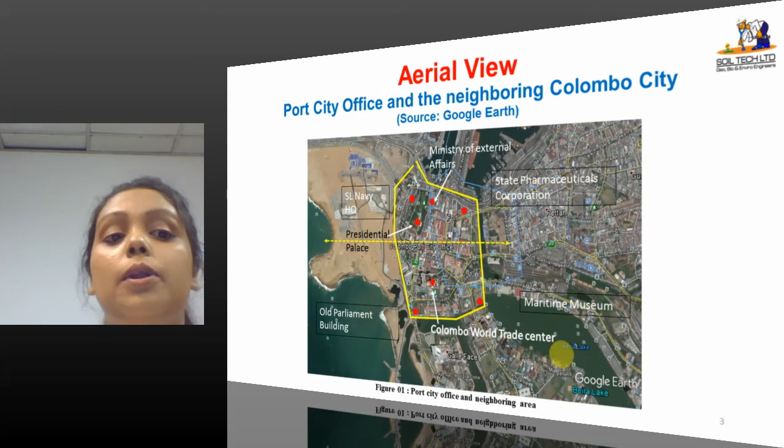This is the site plan of the Port City area, and this is the aerial view. Here you can see many major buildings like the Sri Lanka Navy headquarters, Old Parliament building, Ministry of External Affairs, Colombo World Trade Center, and many more, as well as smaller buildings. We say they can be affected due to this Port City project. So how is it going to affect them?

The total land area of the Port City is about 269 hectares, and about 56% has already been reclaimed. For this we are going for a geological analysis, and with that we are going to present our assumptions and the possibilities of what can happen.

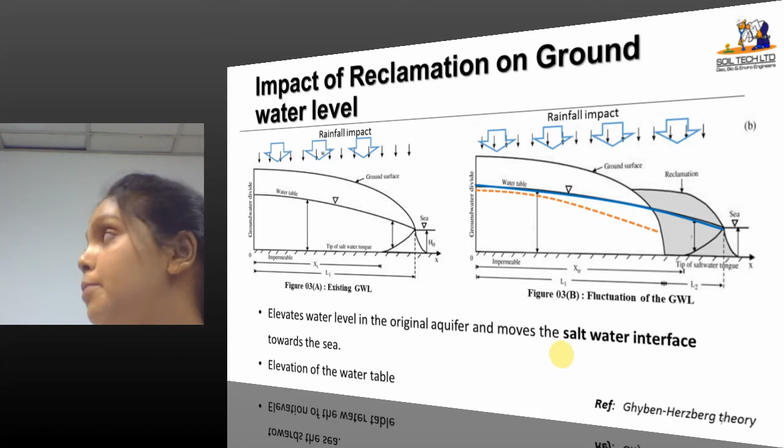So due to this land reclamation, basically the Port City land reclamation, the groundwater level can rise up to some meters, and with that some impacts can happen. Our assumptions are all based on the groundwater level data we have collected and the subsoil data.

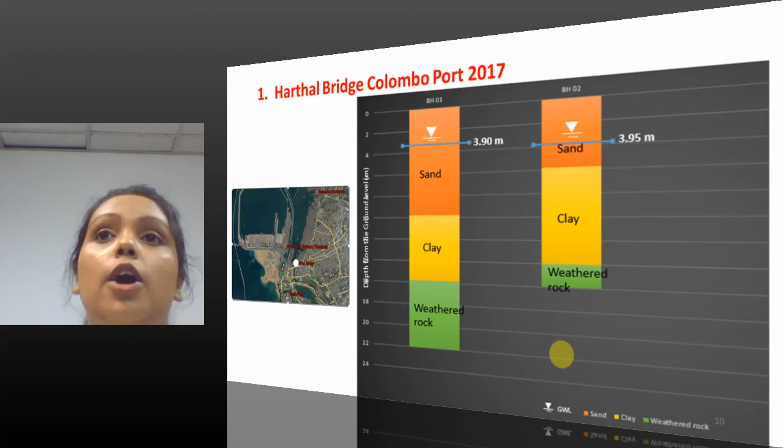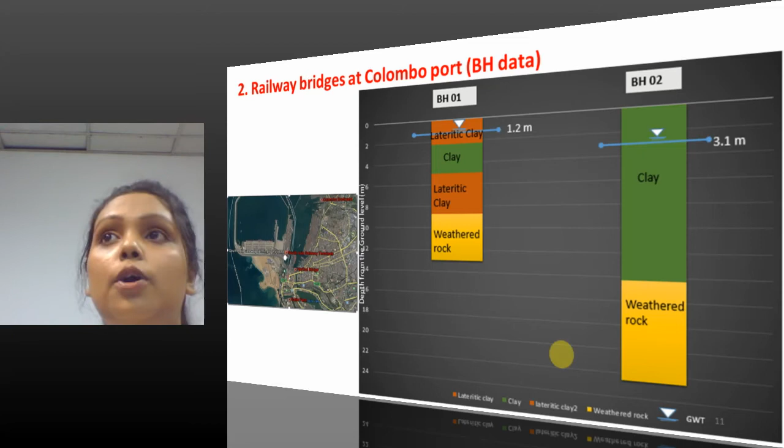Considering the Harthal Bridge at Colombo Port, we did some boreholes there in 2017, the most recent one, and found the groundwater level at 3.9 meters below ground level. The second is the railway bridges at Colombo Port, where we found groundwater at about 1.2 meters below ground level, and in some places 3 meters. Another borehole in SAGT Colombo Port showed groundwater at about 2.7 meters below ground level.

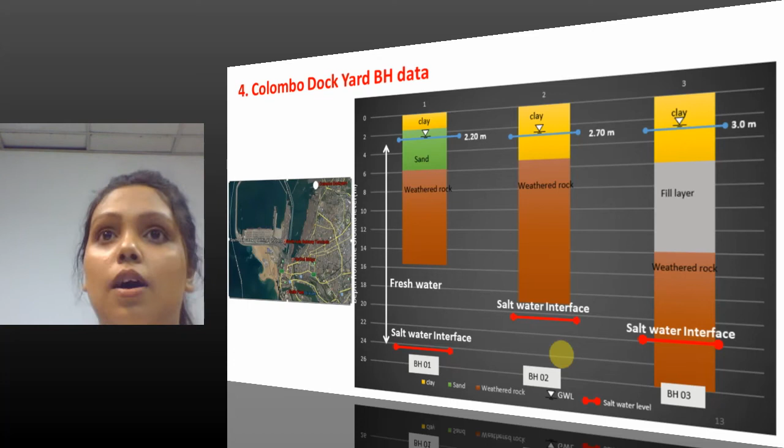At Colombo dockyard we did some boreholes as well as tube wells. In the borehole we found the groundwater level at about 2.2 meters below ground level. The most interesting thing is we found the salt water interface at about 24.3 meters below ground level, and here 21 meters. Up to that extent, in our tube wells, we were able to find fresh water. These are the tube well data we collected from Colombo dockyard.

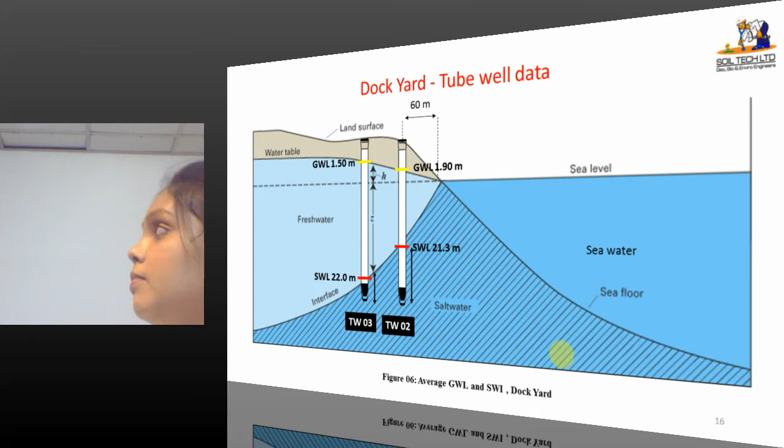This is what we have shown with the graphs. Here are the groundwater levels, and here the salt water interface. You can find some mixed water, but up to some extent you find fresh water even close to the coastline. The distance is about 60 meters from the coastline, but you find fresh water. That means there is considerable groundwater in the port area.

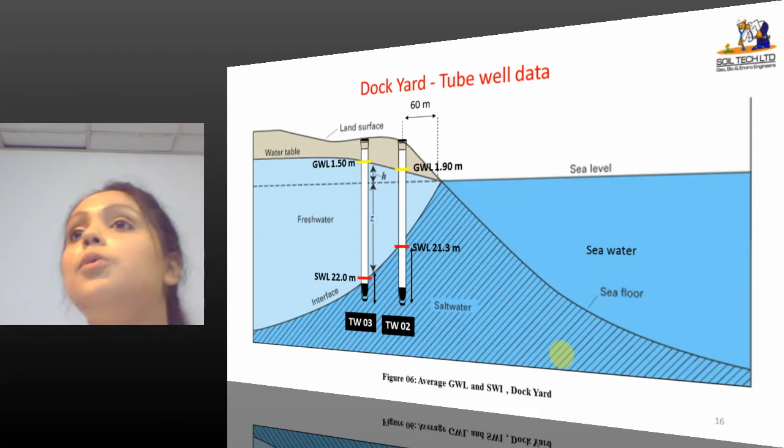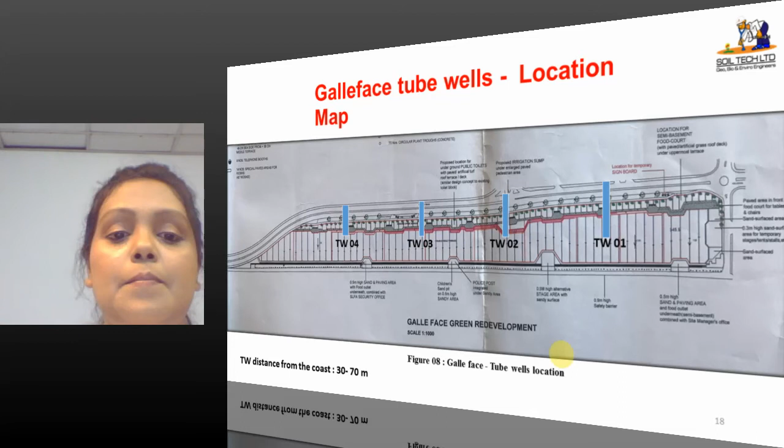These are the tube well data, and with the chemical analysis, basically the electrical conductivity of water, we found they are good fresh water which is more consumable, and the seawater level we found at about 16 meters below ground level. This is the graphical illustration of the water levels of the Galle Face area. Up to this extent, you find fresh groundwater.

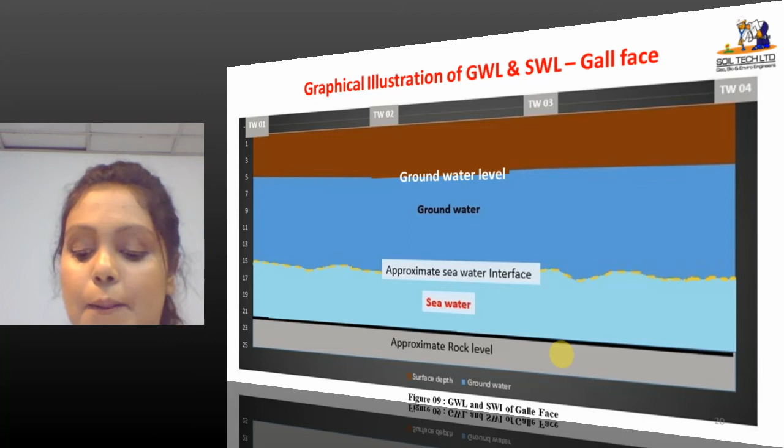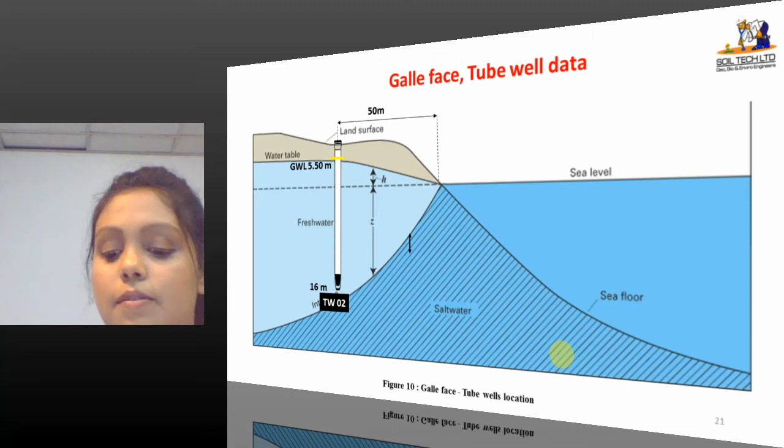The second part we did was subsoil data analysis. By using the boreholes we did again in Harthal Bridge, using the SPT values, we calculated the bearing capacity using Terzaghi. So in this graph, the red line shows the bearing capacity when the groundwater level is 3.9 meters below the ground level. That is the existing ground level.

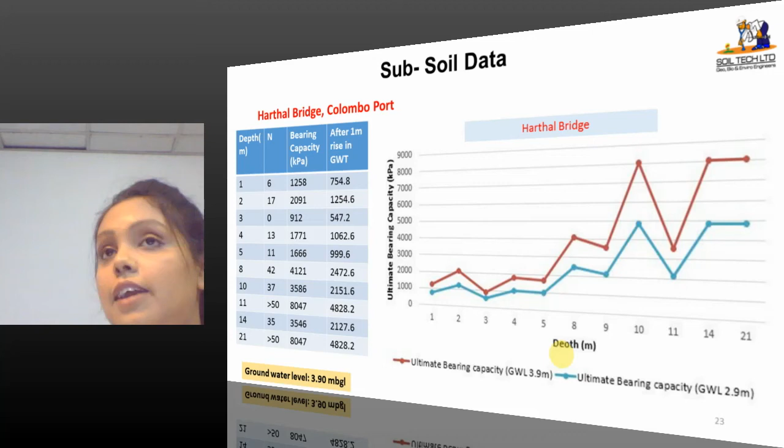And the blue line shows what happens when the groundwater level rises about 1 meter. The bearing capacity reduces by a considerable amount. Here you can see the bearing capacity is 8047, but when the groundwater rises by 1 meter, it reduces to 4828, a considerable reduction.

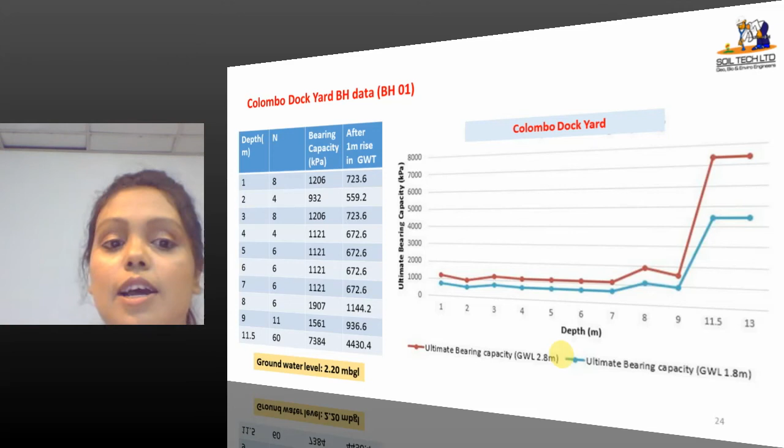Here we again calculated the bearing capacity using the SPT values with the boreholes we did in Colombo dockyard, and it is shown in this graph. See how much the bearing capacity reduces just after a 1 meter rise of groundwater level. And here, SAGT, South Asian Gateway Terminal, Colombo Port.

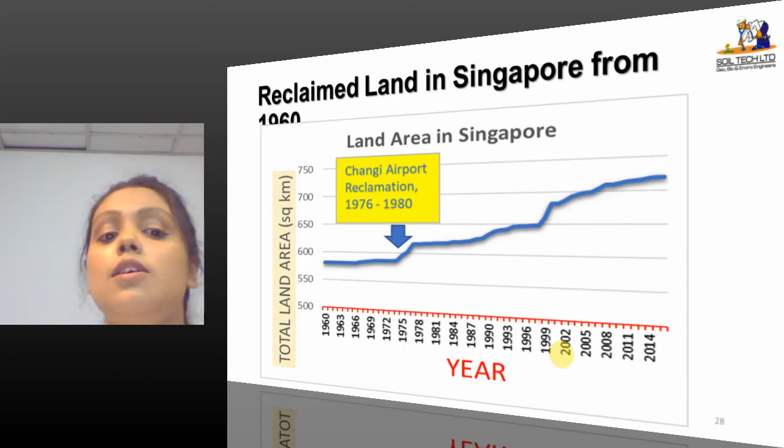Here again we calculated the bearing capacity, and with all these data we can see that with the increment of the groundwater level, the bearing capacity definitely reduces. And we have more examples around the world. Not only Sri Lanka does this kind of land reclamation, but Hong Kong, Japan, the Netherlands and Singapore have done this kind of reclamation. The Changi Airport is a very good example from our Dr. Karunaratne, since it is his experience. So this is all based on coastal reclamations.

Now we are going to mainly focus on the impacts, what can happen when the groundwater level rises. It can affect structures and buildings we mentioned in the previous slides, like the BOC headquarters, Sri Lanka Navy headquarters, and the Parliament building. Structures on simple footings can be affected, and buildings on piles can also be affected, but they are much safer than buildings on simple footings.

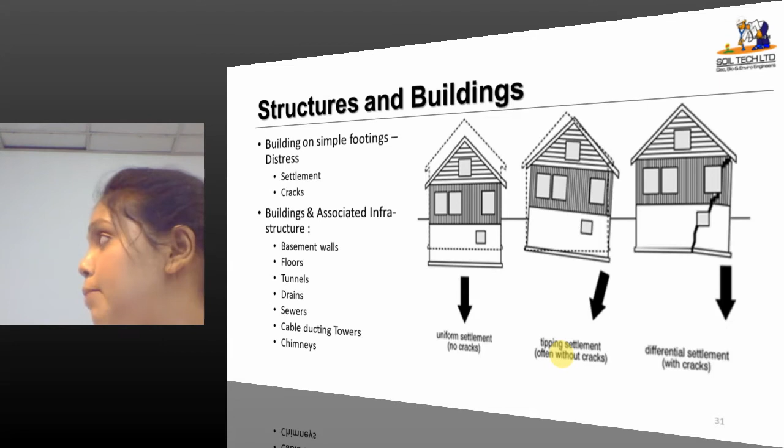So what happens here? The basic thing that can happen is settlement, and due to settlement, cracks can occur. If the walls or floor of a building get cracks, you can simply assume that is due to settlement. If it is a uniform settlement, sometimes you will not feel it for some years. But if it is a differential settlement, you will definitely get cracks in the floors and walls. And not only buildings, but tunnels, chimneys and towers can all be affected.

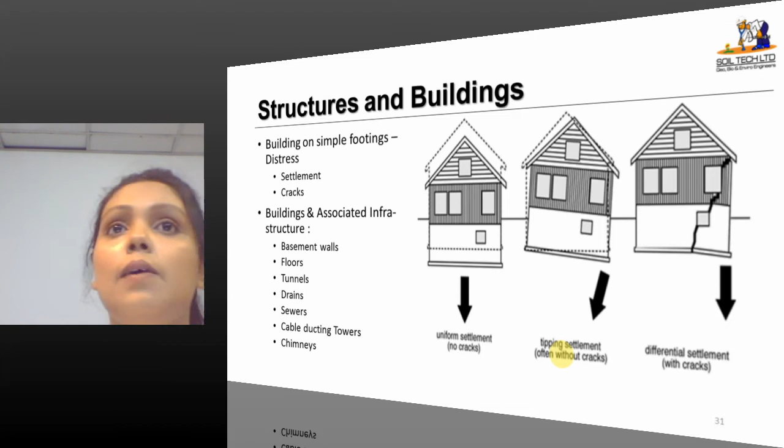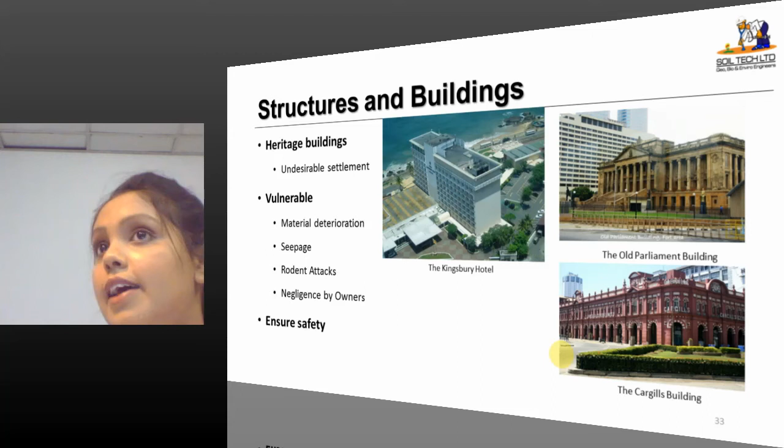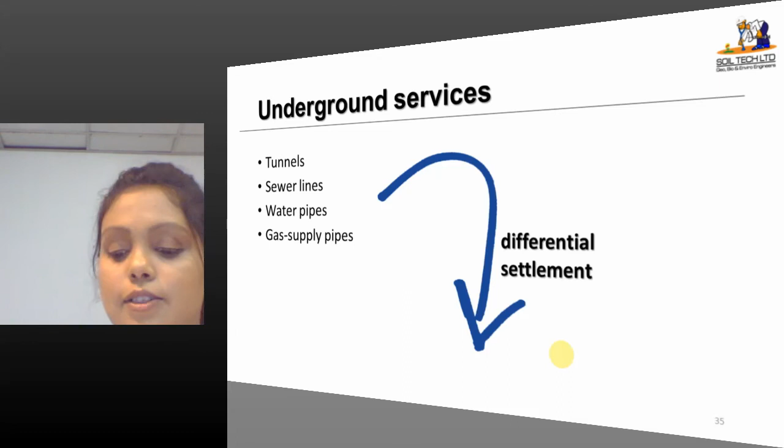The other one is underground services, like sewer lines, water pipelines and gas pipelines. These can also be affected by differential settlement: joint dislocations, leakages and cracks can happen. There are many examples. As an example, I took these from news articles about what happened in Tamil Nadu due to leakage of underground gas pipelines. These kinds of disasters can happen due to such a simple thing.

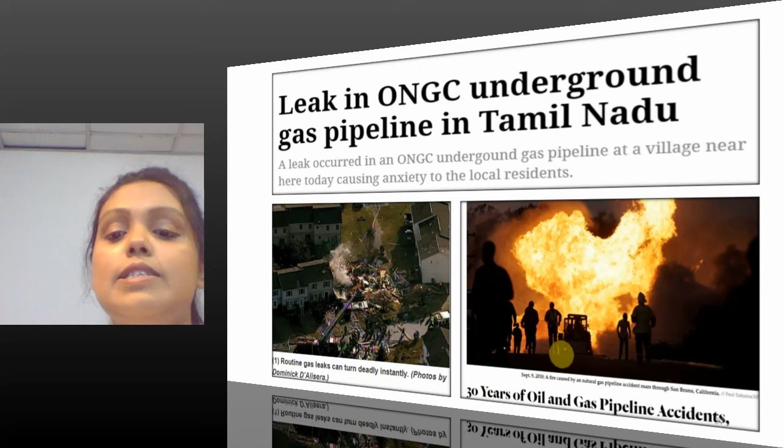The other thing is environmental issues. The water quality in wells definitely changes, so we can say something is happening with the underground water level.

So I invite Dr. Karunaratne to go into more detail about this research, and thank you.

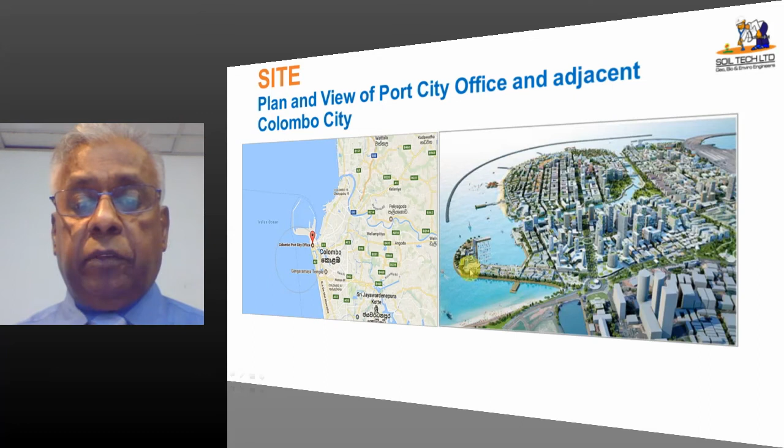So we are trying to find out the influence of this reclamation on the groundwater in the adjacent area. I thought the nearest area is Fort, so let me go on to the subject. This was shown earlier, the plan view of the Port City office, and then you see the breakwater going over there, and the part we are worried about in plan is the reclamation over there.

So if I go to the large scale map, here is the Colombo Port City office, and this is the Chaitya road, and this is the water body coming from the port area towards this. Some of you may know there is a gated connection here, so the water from here to there can be sometimes different. And then from the Beira Lake, it comes over here.

Now our study here is, when you do this reclamation adjacent to the Chaitya road area, what will happen to the water table, because some of the work done by Soil Tech, as shown by my previous speaker, had found that some of these boreholes and tube wells have a very remarkable way of varying its properties, especially the freshwater part and then the saltwater part.

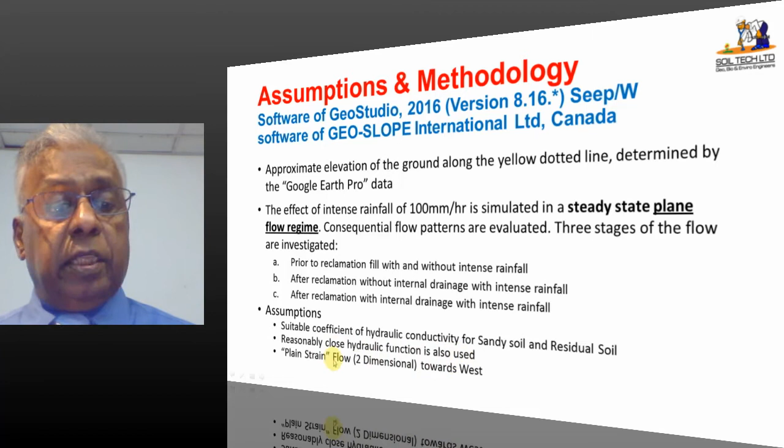Then we have a reasonably close hydraulic function also assumed, which is the hydraulic conductivity of the sand. And then, as I mentioned earlier, plane strain flow is taken into account. Now, there are a few cases we have studied.

The first case is no reclamation, no rainfall, there is drainage at Chaitya Road, and what will happen to the groundwater table. This is the base analysis. And we have got a value of 1.17. I'll show you the results.

We assume the permeability of the sandy soil to be about 0.005 meter per second at 10 kilopascal, decreasing to 1/5 of that at 100 kilopascal. Subsequently, I changed this number to 0.5, meaning let's assume the sandy soil is a bit more pervious at 10 kPa, and these results I am going to show you.

And then we put the reclamation, rainfall, no drainage, then the reclamation, rain and drainage. And I am also going to show you slightly more efficient drainage at the same location.

Now here is a base diagram for this. As you see here, the sea is on the left hand side in this diagram, and this is the fort area along that yellow cross section I did.

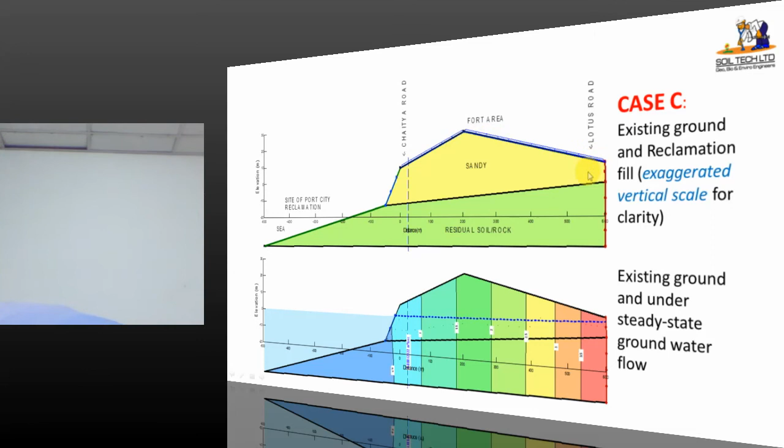Now I wonder whether you can see that arrow. Can you see that arrow, those at the back, or should I use the red light? Red light is better? Okay. There are some of you who are as bad as me with respect to eyesight, so I appreciate that point. Now this is, the only problem is I have to change my head that way to see that, so you may lose the voice there.

So be reasonable with me. Now this has got a horizontal scale which is different from the vertical scale. As you know, the fort area is not that hilly as shown here, so I have exaggerated the vertical scale, and the horizontal scale, as you see from here to here, is about 100 meters, whereas some of that is only 10 meters.

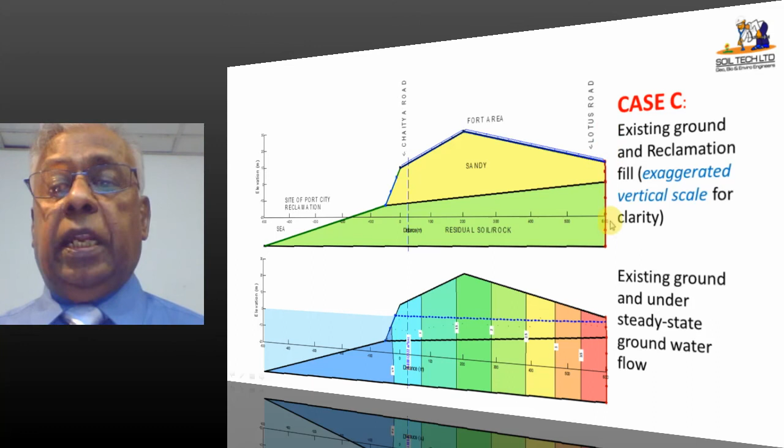So once that has been done, what is done here is, in the second diagram, simulate the sea level on the left hand side, and then use the existing groundwater table. What are the boundary conditions? On this side, this is that canal coming from the port area toward the Beira Lake. So we have a boundary condition which is about 4 meters high, and on this side it is the sea level.

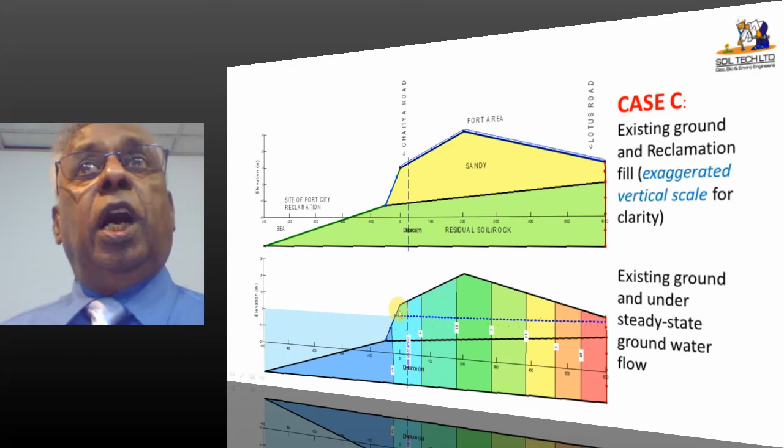So that side is the sea level, and therefore you can see that the water table is going to go down. That is a reasonable assumption that anybody would say, and that is how it looks like. So I thought the software seems to be working if that's the case.

So if you go to the next one, what we have done now is on the left hand side, the reclamation is now fully operational, but there is supposed to be a drainage system there according to the project report. But imagine that the drainage is closed or blocked. Then what happens when you get rainfall of 100 millimeter an hour? This is what happens. It goes up and comes down.

Now the only question is, are you sure that it will rise so much? You will be surprised that the values I am going to show you are beyond imagination. But don't worry about the numbers. Numbers are not that important. Get the trend. That is what is important right now.

Okay, let's go to the next one. I am going to give you some results. This is the first one I got, 1.17, no reclamation, no rainfall, drainage at this, the groundwater table at 200 meter from the edge of the Chaitya road.

So if I go back, 200 meter at the edge of the Chaitya road is shown here. Chaitya road is somewhere here, 200 meter comes around here. So it is quite close to this peak there. So I always get that point for comparison. You can take any other point as well, but that is good enough, I think, for our analysis. So if you get that, you can see in the second one, if there is rainfall, no reclamation, it can rise to 13.18.

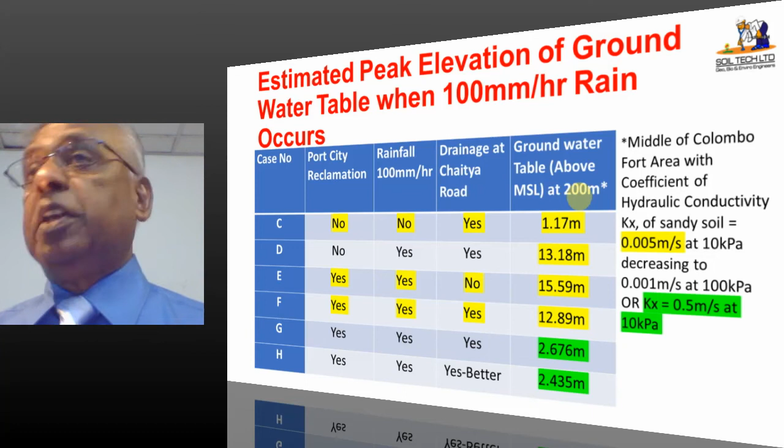The next one says there is reclamation and there is rainfall, no drainage at the Chaitya road. It can rise further. And the next one is, if you allow the drainage to take place, it drops a little bit. Now I change the permeability from 0.005 to 0.5, it drops. That looks reasonable. So somebody might say, why don't you use reasonable numbers? So you have to try and see. That's what the engineers do. Try various possibilities and get some idea.

So now we see a very important thing. If there is a reclamation, if there is rainfall, if there is drainage, still the water table can rise. The water table will not stay at the same level as before the reclamation. Therefore, we have a problem. Will the water table rise? That will affect the buildings and other infrastructure within the fort area. That's what my previous speaker pointed out. So let's go to the next one.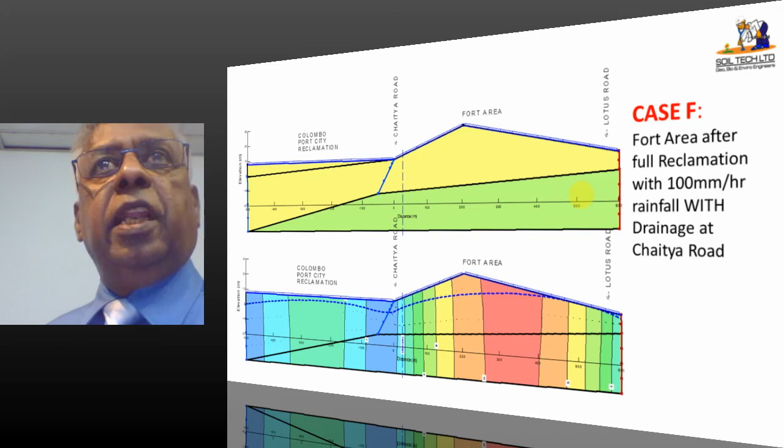Now, this case is slightly different. I am adding the drainage there. As you see here, the trend is correct. It drops here, then it goes there. So within the reclamation, the water table rises here. And this is like Jaffna Peninsula. If you have a well here, you can take fresh water from there. But slowly it will go down, and sometimes it might become level with the sea level, and you might absorb seawater as in Jaffna Peninsula. So you have to be careful. But anyway, as you see here, if you have a drainage system, this can be controlled.

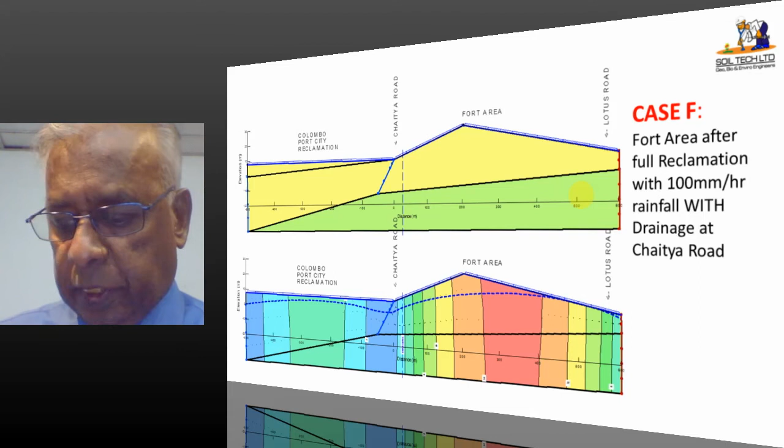Now the observations are very simple. All reclamation changes groundwater conditions in the adjacent environment, unless you are reclaiming and forming an island far away. With the progress of the reclamation, changing rainfall intensity, drainage provision and the sea level, the groundwater level will respond correspondingly. Unfortunately, the groundwater level will not go down, but it will go up because you are blocking the normal path of the water.

Then the second is that the port city reclamation is lying to the west of the fort area geographically. The groundwater table of the Colombo fort area appears to be influenced by the proposed port city reclamation. We are not saying something is wrong with the port city. We are only saying that if there is a reclamation nearby, then the adjacent ground in the mainland may have a changing water table. If the water table changes, what would be the impact on the rest of the infrastructure, etc.

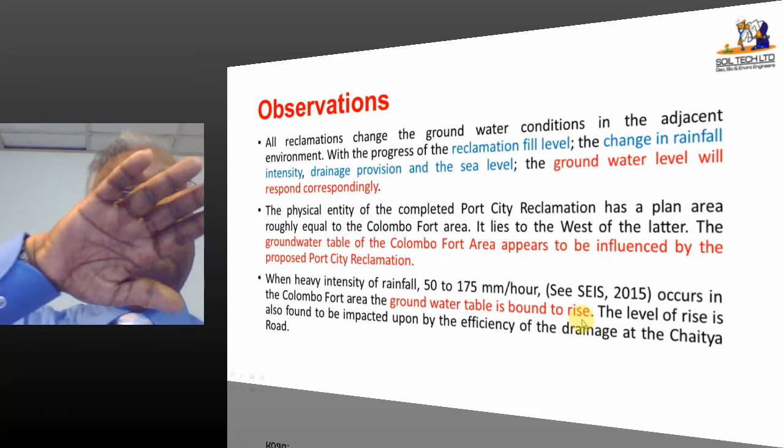Now, with heavy intensity of rainfall between 50 to 175 millimeters per hour, as I said, see the SEIS 2015 report, if that occurs in the Colombo fort area, the groundwater table is bound to rise. And my previous speaker showed you water table variation within the ground when there is a reclamation; it is found in your flyer on page 2, with the same figure, and you can see the reclamation will cause the groundwater table in the mainland area, the fort area, to change, generally to go up.

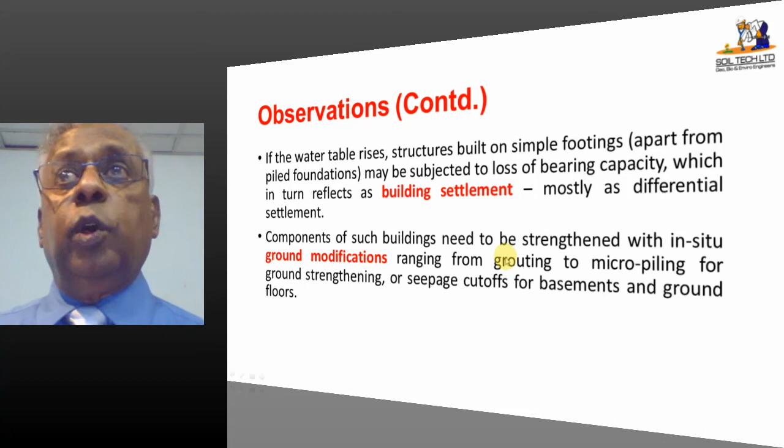And the observations continue. Now what happens if the water table rises? Building settlement is a problem. If buildings are founded on simple footings, you know that the bearing capacity will be affected. And the only way to handle this situation as engineers is to imagine that some buildings have simple footings and will be subjected to water table rise, and therefore we have to take appropriate preventive action. How do you take preventive action? You must know which ones have simple footings, not piles. So we have to have a feedback system or get the information.

Data must be obtained. So I'm going to look at those things here after this. Now, in order to support our idea, this author J.J. Jiao submitted this paper in Groundwater in 2001. He mentioned that a significant increase in groundwater table can happen if the scale of the reclamation is great and the hydraulic conductivity of the reclamation material is low, which means that if the reclamation of the port city is a tiny one compared with the fort area, you may not get that much of an influence.

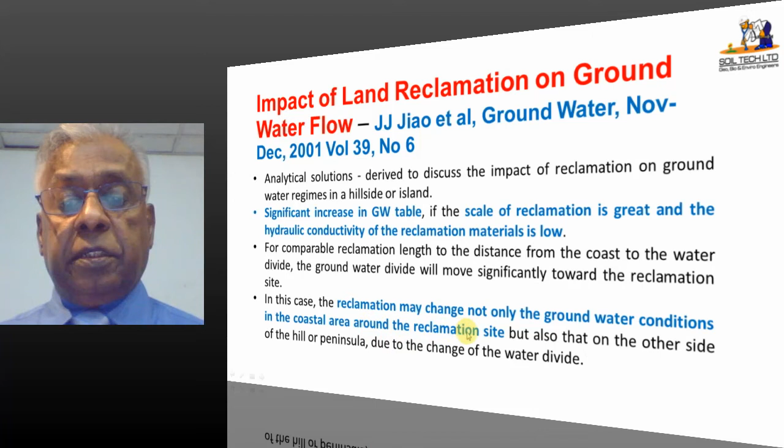So if they are about the same size, naturally one may influence the conditions of the other one. And then the last one shown here is the reclamation may change not only the groundwater conditions in the coastal area and around the reclamation site, but it can also change other things within the main area. And lastly, he also mentioned that the groundwater regime due to a large scale reclamation should be studied. Why? Change the coastal environment.

There are other things. I think a hydrologist may come and say, because of this reclamation, our littoral drift has got changed, or the Kelani River mouth has got choked. I don't know. This may come up later. I'm not speculating at the moment, but it can happen. And then some of you may later find that somewhere down Hikkaduwa or even Galle Harbour or some other place, there are some chain reactions. They come with time. So each of these must therefore be kept in mind. If something is changing, keep in mind something is changing, and therefore see whether there is an influence from some of these things that are coming in.

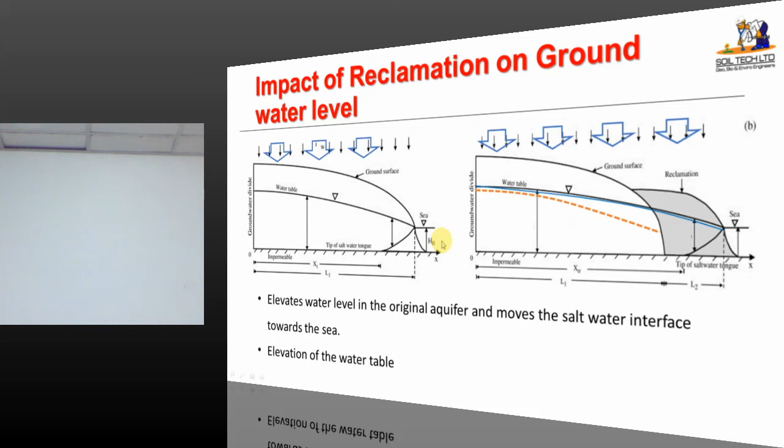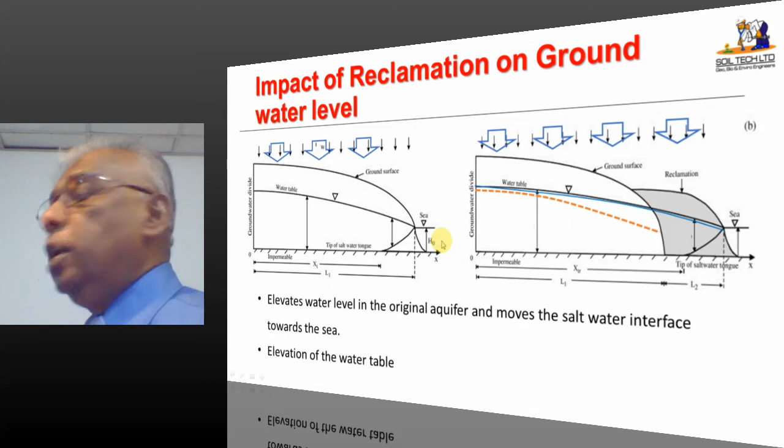Now what is interesting here is again that when you do the reclamation adjacent to this with no drainage, the original water table shown in red color changes to that one. So you can see it automatically goes up. Most of the thing is taking place here, but if you have a drainage here, you can actually control this new water table to a lower value. So there are various ways of helping this problem if it occurs.

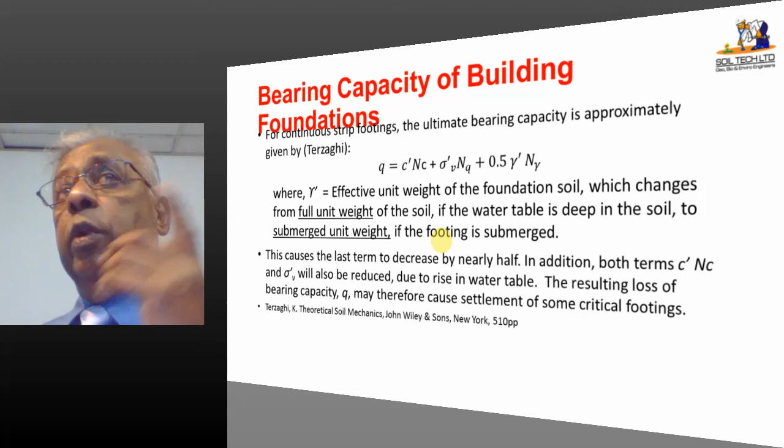Now I'm going to quickly go through the bearing capacity. Now there's nothing to argue about what is the best bearing capacity equation. Doesn't matter. But I'm taking a simple one, what is called Terzaghi's bearing capacity formula. This has got three components for strip footings. There's one coming with Nc, the cohesion part, then one coming with the surcharge part applied on the footing. The third one comes with the friction part of the material underneath. And as you remember, it has got a triangular part below the footing, and then there is a logarithmic or curvilinear part ending up with some wedge shape failure case.

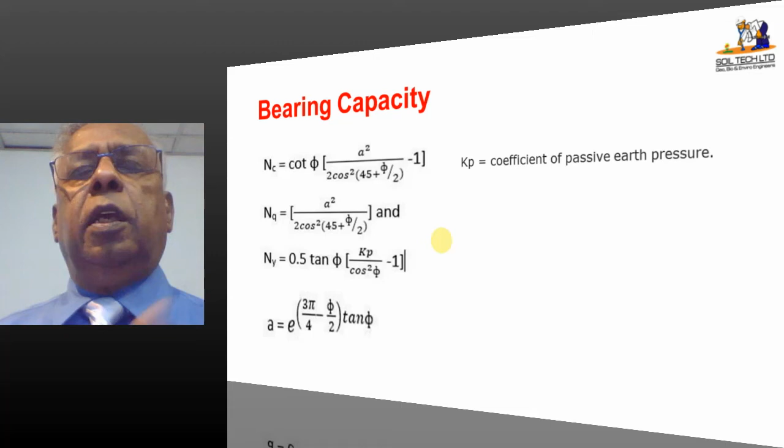Now, what I'm going to do from this point was that these are the parameters that you normally use, Nc, Nq, and N gamma, connected with A, where A is a function of the friction angle. So I'm going to use as an example the friction angle for loose to medium dense sand as 30 degrees. So if I take 30 degrees for this, and here is the simple footing with a width B, and if it is sitting over here, and if this distance is more than 1.5 B, you know that the groundwater table at level 1 has no effect. It's generally dry. But if the groundwater table rises to 2 or to 3, we may have a problem.

That's what we are studying in this case. So if I take Q with this equation, the corresponding values for 30 degrees: for NQ it is that, N gamma is that, NC is that. If the water table is below 1.5 B, such as line 1, there is no effect.

If it's at line 3, what happens is, at this point you get submerged density, because the water table is letting the sand go upward because of the submerged density. So that sand cannot sustain the load coming from the building footing. Because of that, that influence comes in. So the second and third terms will be affected, because in the second term sigma V prime is now effective stress, gamma minus gamma W multiplied by H.

If these two values are taken into account, I'm going to compare Q1 corresponding to line 1 and Q3 corresponding to the top one, line 3. See, Q1 is written like this, Q3 is written with these numbers, where sigma V prime is gamma minus gamma W. Once you have written it down, subtract Q1 minus Q3, the common factors go away, and we end up with this one. So you can see it's gamma W H times NQ, half gamma W B N gamma, this is N gamma 18.4.

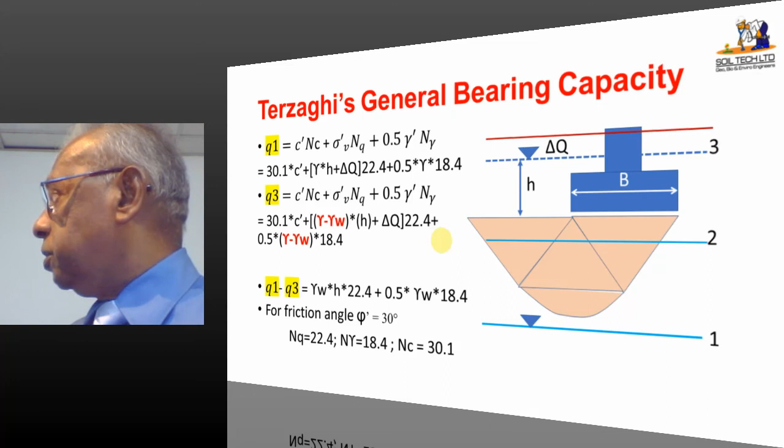And look at the next set of results. Supposing I have the water table rising half a meter, 1 meter, 1.5 meters, those numbers tell you that you are going to lose 200 to 300 or 400, etc., depending upon how much the water level rises. So water level rise may be important in some buildings where you have simple footings, not mat foundations, not pile foundations, but individual footings, whether strip footing or rectangular, square or circular, doesn't matter, they may have a problem. So keep that in mind.

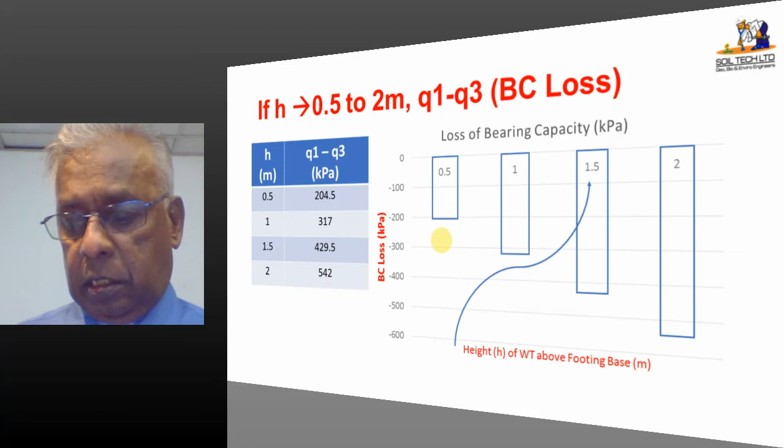This is approximate analysis, anybody can do this analysis. If you want to get 6 kilonewton per meter squared loading per floor area, imagine that you have columns at 5 meters by 5 meters, then the total load on the footing will be given by this, and if you have a 2-story building, this will double. These are very rough calculations, there may be a structural engineer, don't worry about these numbers.

And if you want to have a factor of safety, what are you going to do? I want to get 37.5 for a single story building. With a factor of safety, it becomes 93.75. So I have to look for 93.75 kilonewton load bearing to design my footing. Now, if I have a 1.5 by 1.5 meter footing, divide this by that, I am looking for 41.7 kilopascal bearing capacity with a factor of safety of 2.5.

Now what happens if there is a water table rise? We have a loss of bearing capacity for a half meter rise. There is a spelling mistake here. A rise above the base of the footing will drop 204 kilopascals. Now there is a very important question we have to ask. Do you want to subtract that 204 from the ultimate bearing capacity or the working bearing capacity?

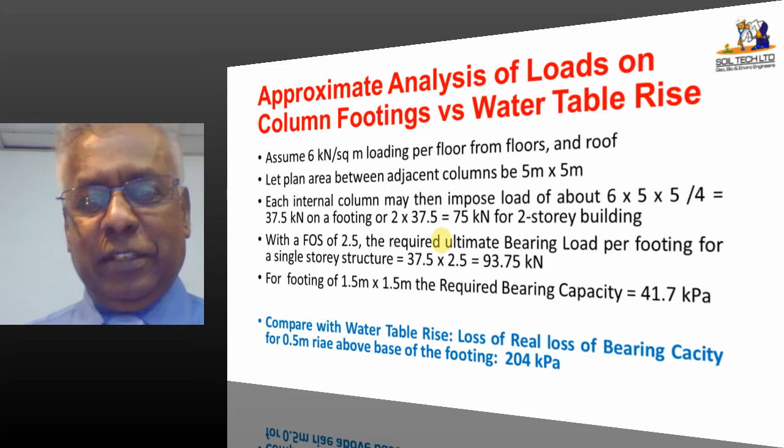All right, now let's come back to this question. We were thinking about this earlier. You may have a full settlement, the building will go down, or differential settlement, the cracks will come into the picture. Or you have this same situation, if the groundwater table goes up, even if there are cracks leaking here, and if your base is very weak, if the base was not designed for that, it will start leaking because the cracks are coming into the picture.

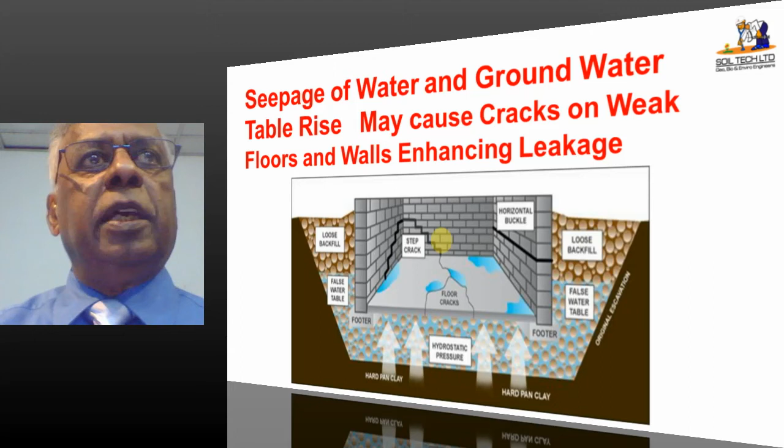Now unfortunately, to solve this problem, we must know the data right now. Does a building, let's say A, have a basement, or is the basement having a problem right now? If the basement is having a problem right now, if the water table goes up, naturally it will have a worse problem. So that's how we are going to look at it.

Now these are the affected infrastructure as shown by my previous speaker. Building foundation, basement wall, floors, tunnels, surface drains, sewers, cable ducting, towers and chimneys, roads and pavements, and the bump at the bridge approach. And this picture was shown earlier, and this is very interesting. It's a very serious problem in places like Indonesia because they have reclamation here and there. But most important is volcanic soil like montmorillonite can expand during the rainy season and contract during the dry period.

And I know there were, what is the right word for that? Very dangerous driving conditions where people go at night. They don't realize that the bridge is like this, about half a meter above. They go and bang on the bridge and they just die. Fatal. I was looking for the word fatal crash. It happens in Indonesia because of the more volcanic activity there.

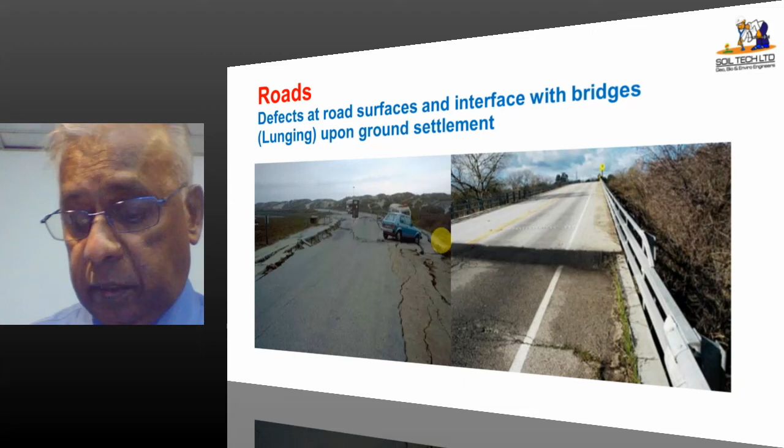Now, I think what I'm trying to say here is we have to have predictive action. That means as engineers we predict, oh, this building may have a problem because of the information we have. So all buildings, old and new, foundations need to be examined by a geotechnical engineer, foundation engineer and a structural engineer for safety. And then all buildings, particularly vulnerable to material deterioration.

There are buildings that are 200 years old, like Cargill's building. I think the old Parliament building is 1930s, not that old. But all buildings may have material problems, we don't know. So those have to be examined. Any building adjacent to roads, etc. must be inspected regularly, because without the knowledge of the owner, some parts may be collapsing and then falling on the pedestrians. Well, I think we are responsible to make sure that the pedestrians can walk safely. In places like Singapore and Australia, I think the owner is responsible as a third party to make sure that nothing falls on their head. So that's the important thing.

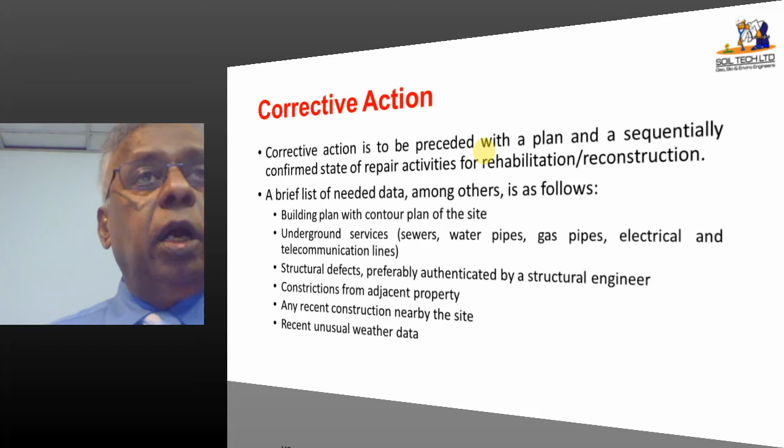And the corrective action is something that one of my other speakers will be talking about. What do you do if you have a problem like this? If you recognize that this is the problem, we have to take action.

I think I'm going a little bit slow, am I? Oh, I'm all right? Okay.

Now these are some of our famous but old buildings. Old Parliament building, 1930, according to a report on the internet, this building was constructed on piles, concrete piles. But one of my colleagues said maybe on timber piles, brought from the Ratnapura area down the Kelani River and then through Beira Lake into the site.

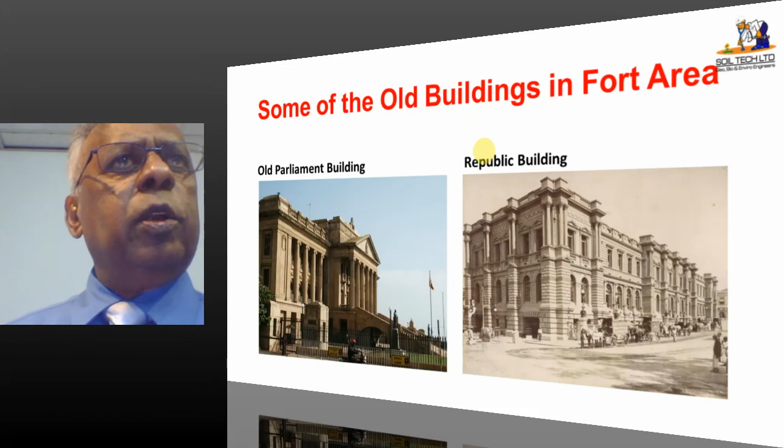How many of you knew that the clock tower is older than the Big Ben? None of you knew that. What is the reason for that? Well, Big Ben and this were installed about the same time, but there was no clock apparently, because the British had to have the war with the Crimeans. So they forgot to put the clock there.

Then about 10-15 years later, the governor's wife asked, you have a clock tower without the clock, where is the clock? So they found that it was still hidden in wherever the storage was. So that's very interesting. When you read some of these stories, I think you can tell the other people.

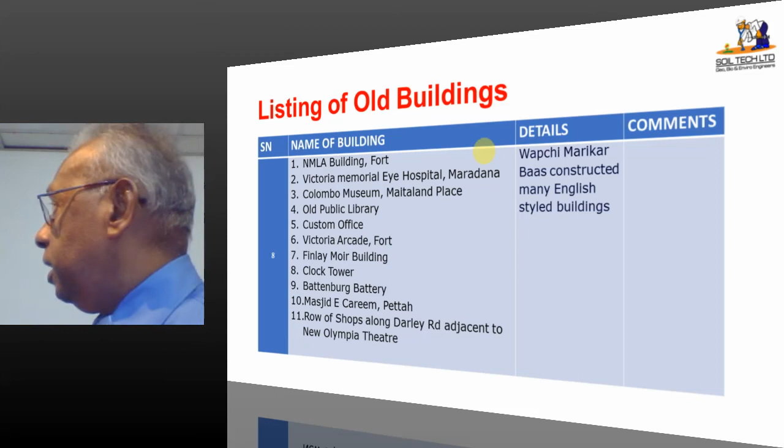And this is another interesting thing I found, that all these buildings were done by Wapchi Marikar Baas. He was the grandfather of Sir Razik Fareed. Some of you may remember Razik Fareed. And interesting thing is, Victoria Memorial Eye Hospital, remember the Eye Hospital Junction, the old building was done by him.

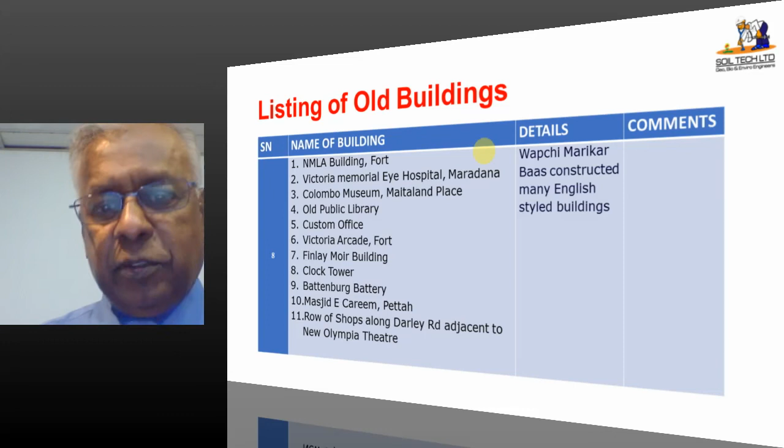I still remember that building, because when we were in Colombo University, we used to cycle from Thurston Road to Maradana Technical College. So we had to go in front of that. So that's what I say, it's nostalgia when you come back.

Observation and monitoring. I think we need to do this. Casual observation with respect to infrastructure or superstructure should be confirmed. So what do you mean by casual observation? When you see an old building and if you see a crack, it's a casual observation. But somebody must record that and then start studying. Will that get magnified, get enlarged, get worsened?

And the temporary or permanent structures within the zones of groundwater rise need to be monitored. That's what is called monitoring. It can be a simple one, it can be a mechanically monitored one. And with the owner's permission, extent of the damage, rate of propagation and the groundwater change with time need to be monitored accurately. I think we have to get the permission of the owner to do this. Sometimes they may not give permission because there are problems.

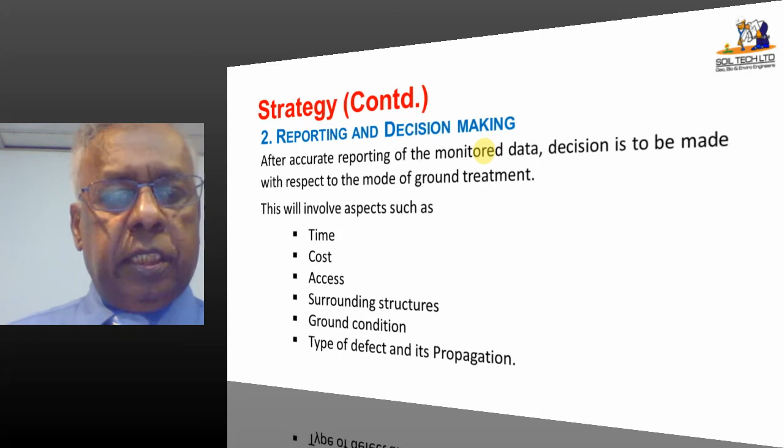As you see here, reporting and decision making. After accurate reporting of the monitored data, a decision is to be made with respect to the mode of ground treatment later. You have to go for the effective but cheapest method. And it will involve time, cost, access, surrounding structures, ground condition, and the type of defect and its propagation, etc.

Now, corrective action is something that we have to talk about. What do you do? But whatever we do, we have to have a feedback system once we have done that. And when we say that we have done it, we keep on monitoring to see whether everything is completed or not. Now, I thought we should have a feedback survey. I mean, anybody can design this. Feedback surveys, if there's a building, you record the address, owner, contact number and various things.

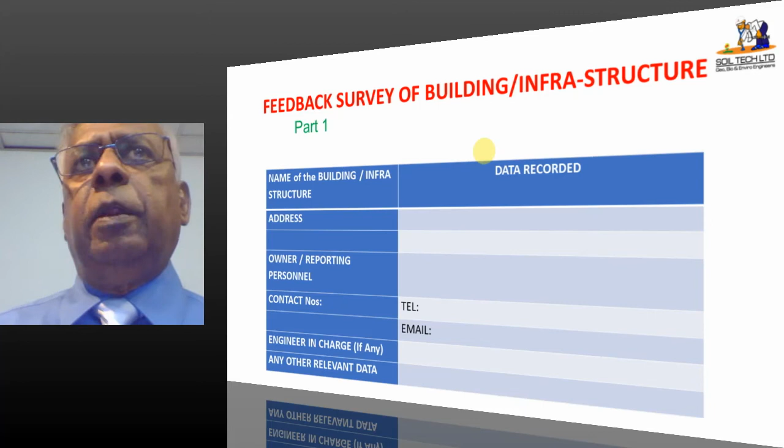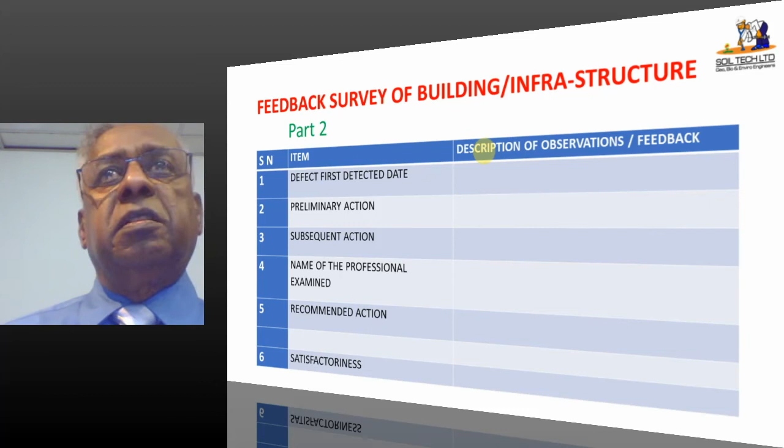And some of the owners, of course, will not like it, but if he has a problem, he will say, okay, monitor it. And then, first time the defect is detected, then preliminary action, subsequent action, then the name of the professional who examined, structural engineer, foundation engineer, recommended action, satisfactory. And these are some of the things that we have to record. Age of the building, type of building, use, how often used, defect, services, subsurface, cracks, settlement, seepage, roof type, electricity, gas, water and various other things like that.

Conclusion, I want to stop here because I think I have taken too much of your time. What are our conclusions? If there is a water table adjacent to the ground, it could elevate as a direct result of the reclamation fill. Now that is for sure, it's going to go up. Irrespective of whether you have got a very efficient drainage or not, it will rise even a few centimeters. That is going to take place.

Then the worst scenario is when the maximum rainfall intensity occurs, like the last few weeks we had rain everywhere. And if that happens, like a cyclonic effect, the water has to get out somewhere. If we don't have the proper channel, then we may have a problem. Elevated water could affect shallow foundations. I'm not talking about pile foundations, shallow foundations, because in olden days, all buildings were done mostly on shallow foundations.

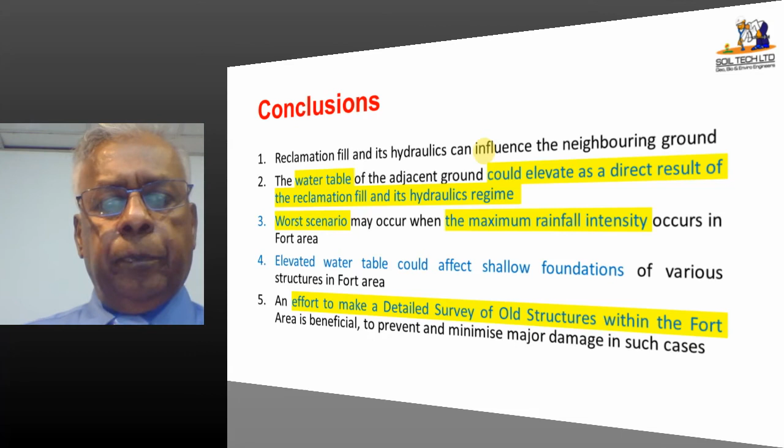Then we have to make an effort toward a detailed survey of old structures within the fort area, in this case, so that it is beneficial to prevent and minimize major damage in such cases.

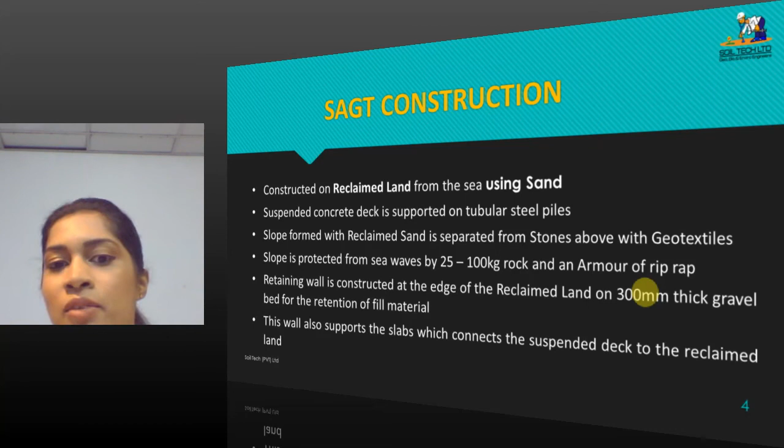Let me introduce what SAGT construction is. It's constructed on reclaimed land, likewise in port city reclamation using sand, and the suspended concrete deck is supported on tubular steel piles. The slope formed with reclaimed sand is separated from stones by geotextile, and the slope is protected from sea waves by 25 to 100 kilogram rock as riprap armor. The retaining wall is constructed at the edge of the reclaimed land on a 300 millimeter thick gravel bed for retention of fill material. Finally, this wall also supports the slabs which connect the suspended deck to the reclaimed land.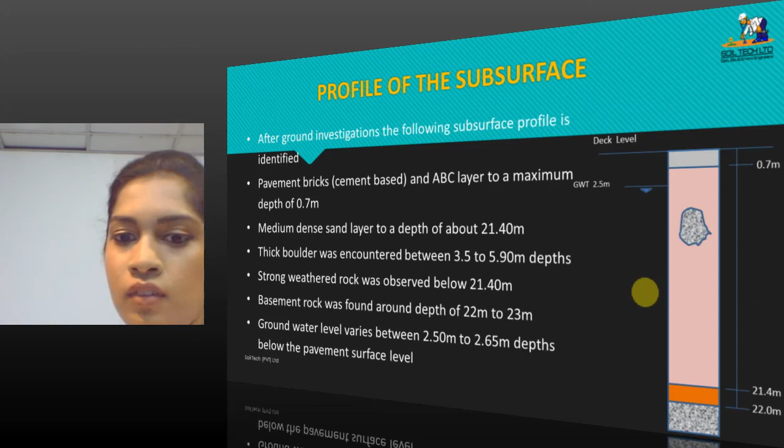This is the subsurface profile. You can see a depth of 21.40 meters, it's a medium dense sand layer, and thick boulders were encountered between 3.5 to 5.9 meter depths. Likewise you can see the subsurface using this diagram.

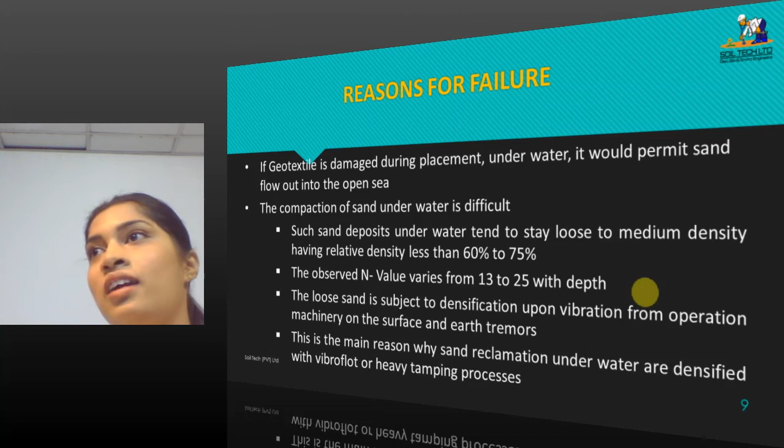Let's move on to the reasons for the failure. The main reason is this: the geotextile is damaged during placement, and underwater it would permit sand flow into the open sea. During the construction period, the cranes were all working on this, and that's why this happened.

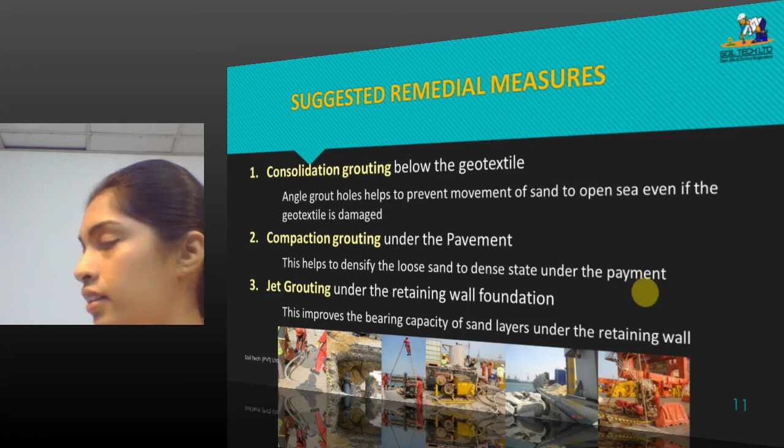For remedial measures, we chose between non-destructive and destructive methods. According to the results, we chose non-destructive methods, and we suggest 3 methods - all 3 are grouting. Consolidation grouting below the geotextile, compaction grouting under the pavement, and finally jet grouting under the retaining wall foundation. We divided it into 3 sections, and we propose angle grouting as well.

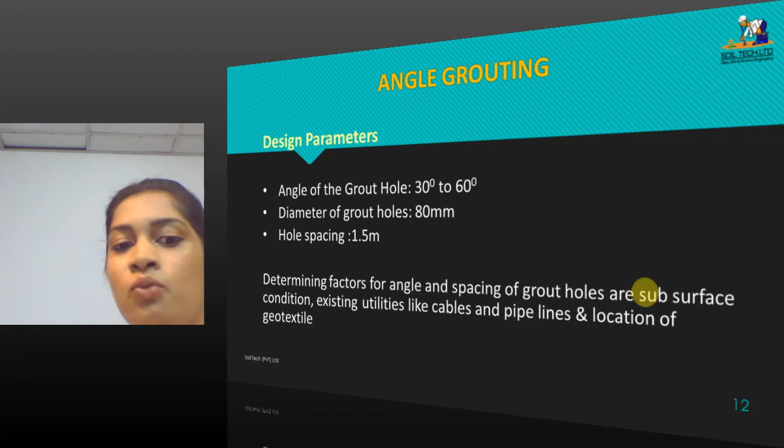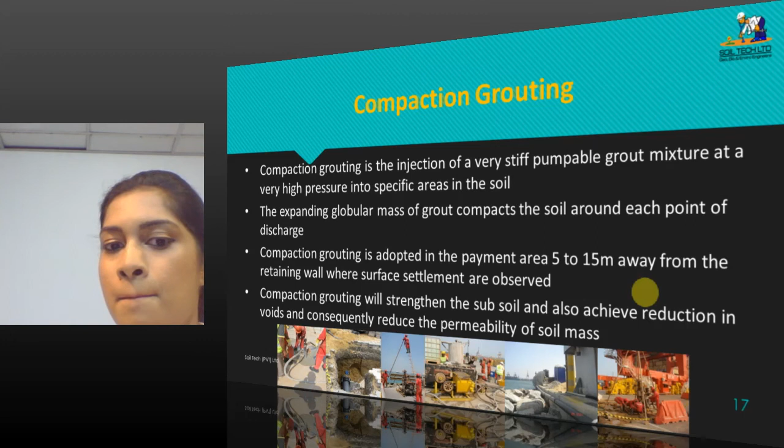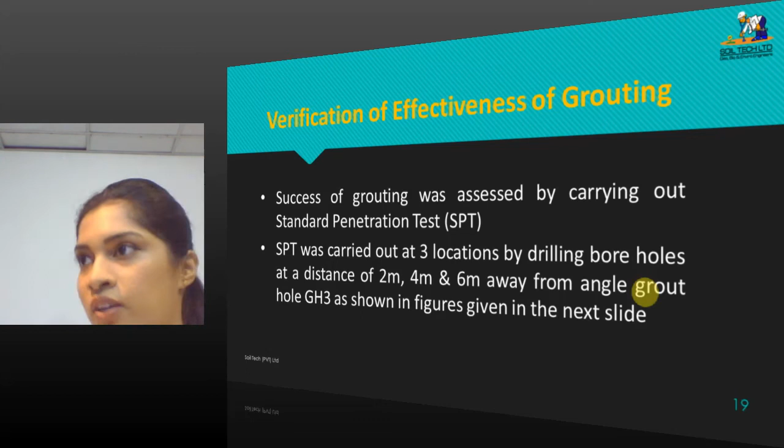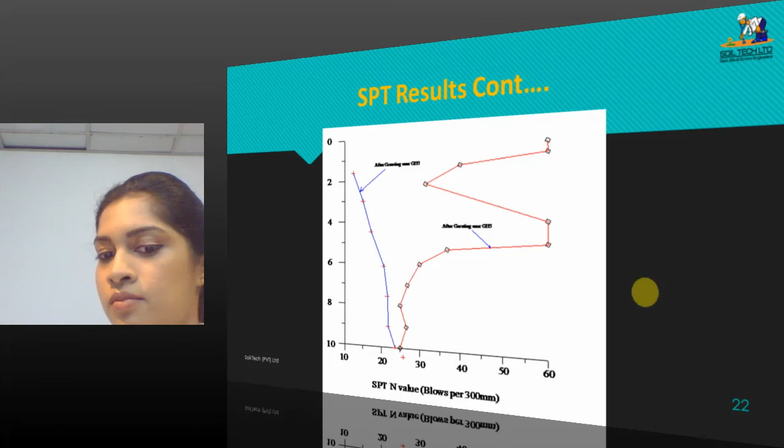After this process, we tested SPT - we got SPT values after and before grouting to verify it. These are the results for verification. This is the graph, and finally this is a video you can see.